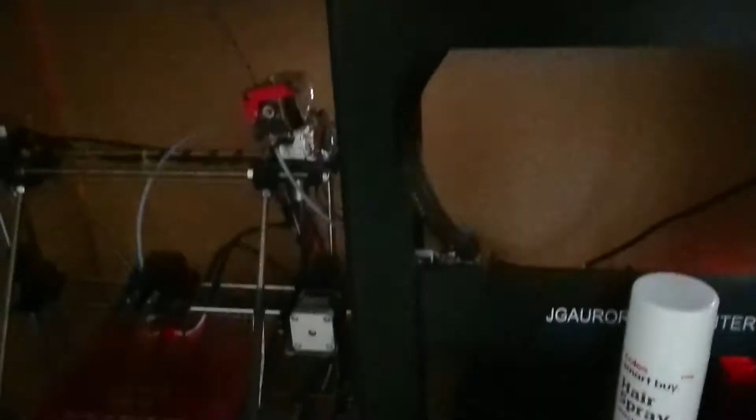The other ones are accessible only by reaching over my printer and my 3D printing area, which is a little condensed, so that's difficult to get to. So again, I think we'll make them electric.

Okay, I apologise for the background noise here. The RAF are doing training overhead.

I have a whole bunch of these motors with rather hefty magnets, as you've probably guessed by the way they're all sticking together in here in a big chain. I'm going to try and use a couple of these to drive the blind cords or blind chains.

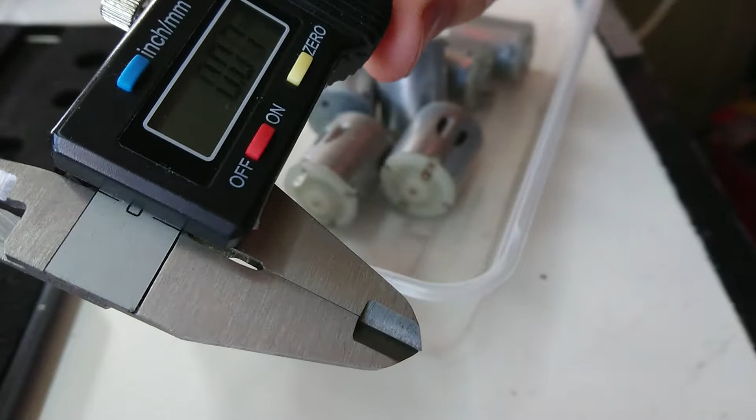I've already played with these before, so I know about the stats. I guess the next thing we've got to do is go and measure up the ball chain and get some specs on that, so I can make a drive cog. And then the decision will be whether or not I make this a belt drive or a gear drive.

Either way, I'm probably going to have to add some kind of a clutch. Although it probably won't be too much of a problem, because if I drive these too far, the blind just flips over the top and keeps making a hell of a racket. So we probably won't need a clutch, actually. So yeah, this could be a simple project. Let's go do some measuring.

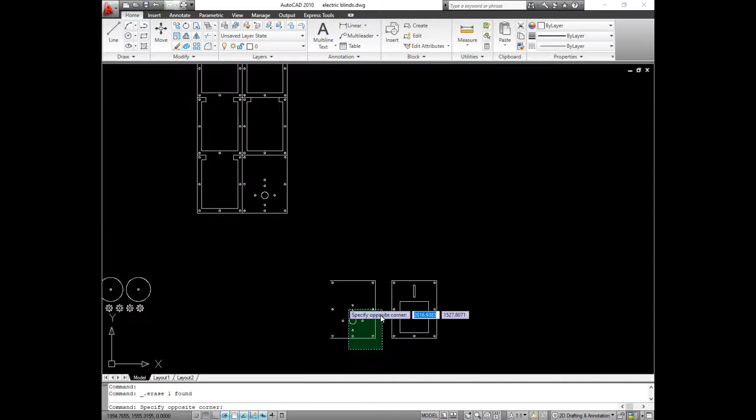After that montage, it's time to go out to the workshop and fire up everything and get ourselves happening. We're going to laser cut some stuff with that big monster over there.

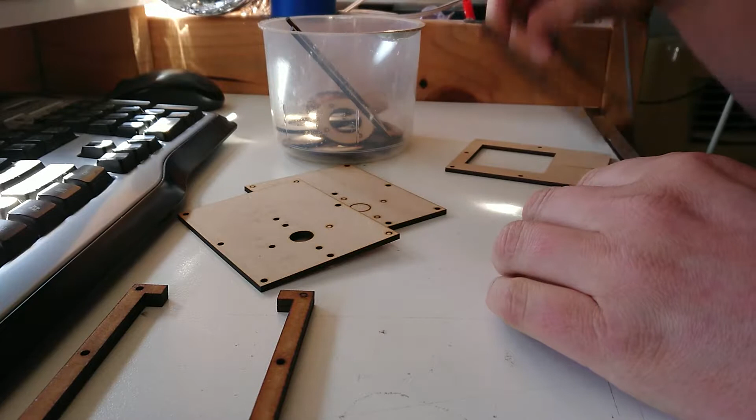Some parts - I noticed two of them I had to cut down. There were a couple of lines, two lines in fact, I forgot to draw in. So we've got some assembly to do and a sprinkling of little tiny parts as well.

First of all, I need to see if that fits the ball chain as I had intended, and then we've got to glue some guides and stuff together. The other thing I want to make sure went as planned is that these gears mesh properly.

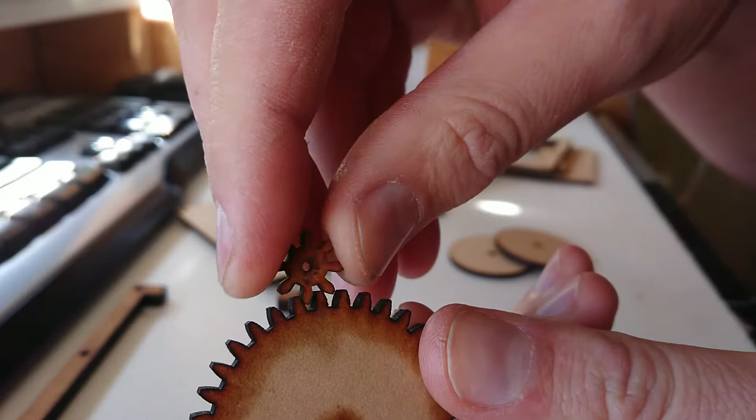They don't when they're up close, but at a distance, somewhere about where I set them, they should probably mesh. But anyway, let's hope that there's enough to reduce the speed.

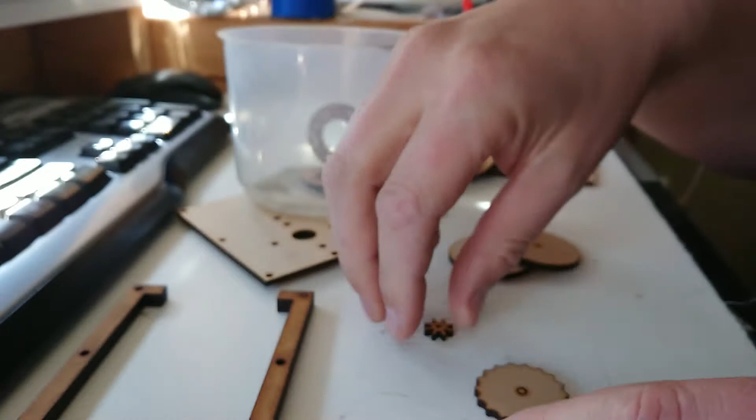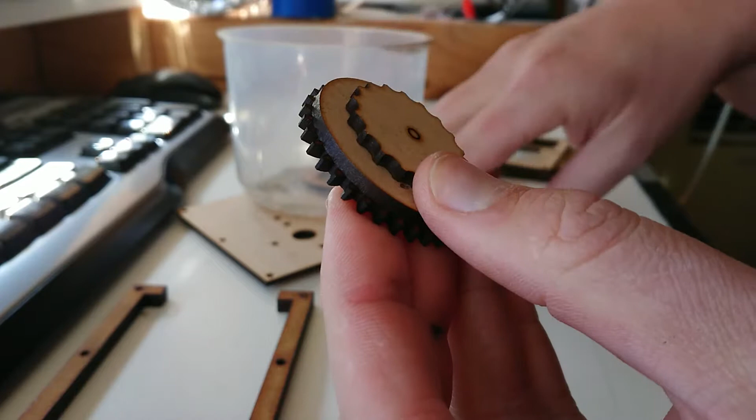Now, the way this will go is there'll be a gear on the outside here. This will go on the inside, and then this will layer in like that, and that should construct a pulley.

I'm not sure if I'll have to pack these out or not. We'll see if they fit the chain. I hope they do.

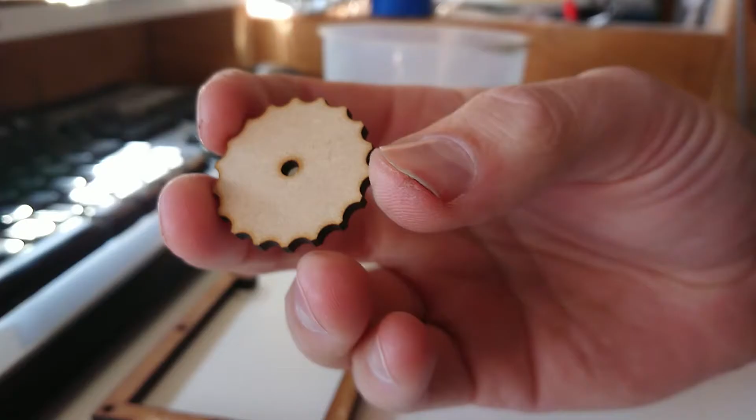Okay, so off camera I just went and checked. This fits the chain beautifully. However, the chain is a little wider than 3mm, which I should have known. It means I'll have to cut another one of these, but that's okay. We'll get the rest done first.

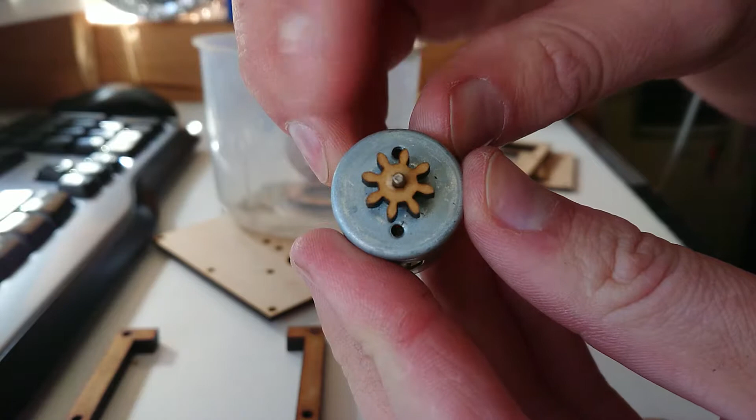Okay, the next step was to check that these would push onto the shaft nicely, and I think I've got the measurements just right. They've pushed through well and onto the splined section. The reason I've cut so many spares is for tolerance's sake - I might end up needing to insert two of these, but we'll see how we go.

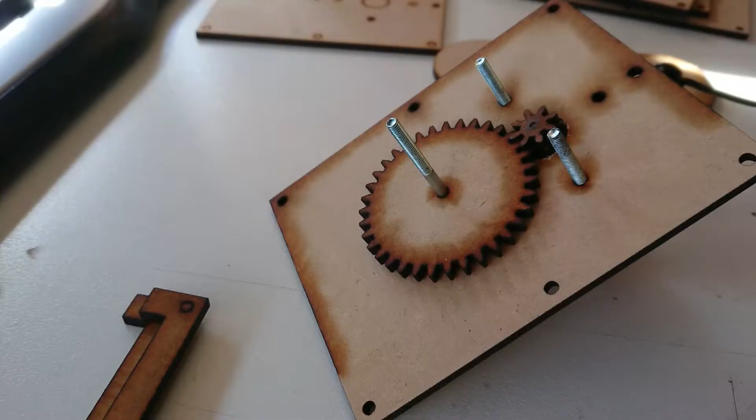The next step before I go too much further is to see how this will behave. I'm going to run this motor off 5 volts to start with and see how it goes, except we're going to have to position everything a little better. I'm going to have to hold this in place while we do this.

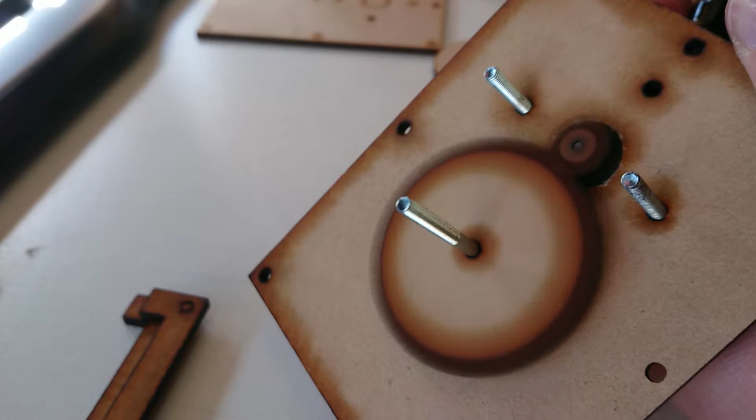That looks pretty good. Let's go up to 9 volts and see if it self-destructs. That looks alright. Let's move up to 12 volts.

It could end up being a little fast, so I might have to put a motor speed controller on this, but that was a consideration in the first place. But it looks like the gears are going to drive okay. A little bit of graphite and they'll probably lubricate up well.

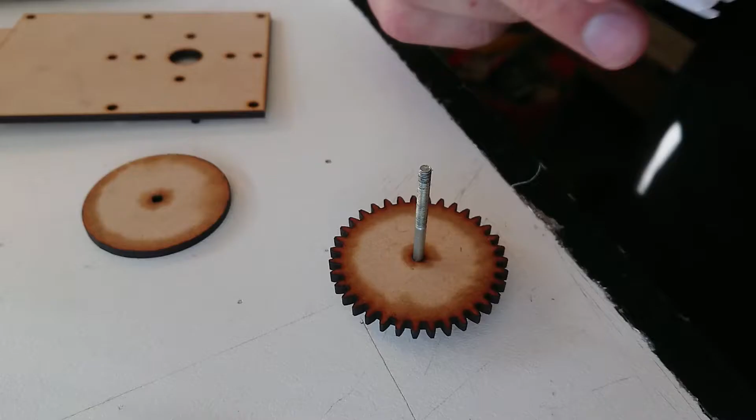Alright, that's good news. Now we've got the fun part - getting the super glue container open and hopefully not gluing my fingers together or anything else to the desk this time. Super glue, as you know or may not know, is best used in moderation.

But when it comes to MDF, it seems to do a pretty decent job. And the next question I'm going to have is, can I do this? My apprentice is excited in the background there. The next question will be, can I do this and still get these lined up properly? This requires a bit of dexterity, which I'm not great with right now.

Alright, they look like they may have gone together okay.

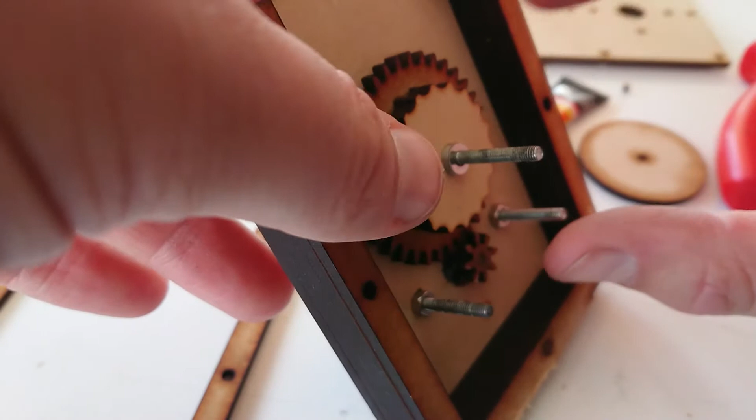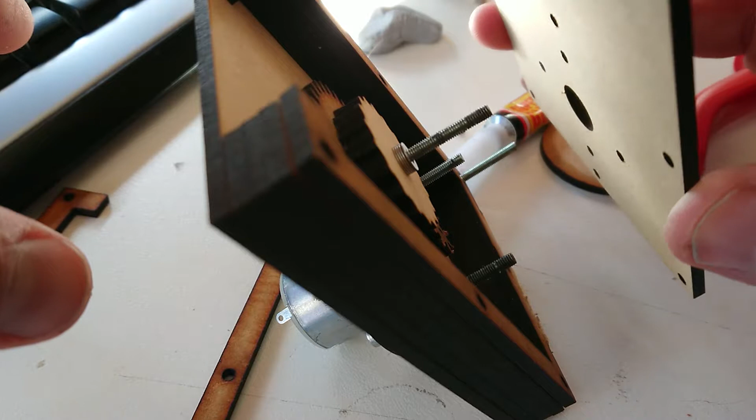I've got everything glued together and assembled. I've got a couple of washers behind and a stack in front, and our back plate should fit over all of this, but of course we'll have to thread the chain through first, and this is going to be a tricky assembly. I'm not quite sure how we're going to do this. I may even attach the back plate first and then go ahead and put the gears on. I'm not quite sure how I'm going to do this bit. I haven't thought too much about how I'm going to mount it to the wall, other than I might use this plate and an extra offset. So yeah.

Okay, we've got everything test assembled here and it all runs well. We have a little bit of graphite over here, and I'm going to add that for lubrication once we've got everything mostly assembled. You can see I've packed out a bunch of washers here, and there'll be some packed behind it. We'll have a back plate to go on to position everything, and then we'll have maybe this one or maybe this one, depending on how we're going to attach that to the original surface. I'm not quite sure yet. I need to test if this will actually drive the chain. That's going to be a little tricky, but yeah, we'll see what we can do.

Okay, so I went and test assembled this and used the lounge room blinds instead of the office blinds, and I discovered a fundamental problem. Whilst everything else works quite well in this, the motor just simply doesn't have enough torque, not at this ratio. And the torque ratio is just way too low to pull the volume on the cord I need. So I'm going to have to add some extra gear ratios into this.

But unfortunately I don't have the time to do that right now. I'm going to have to hang around, or maybe I might even have to find myself either a bigger motor or maybe even a stepper motor. But at the moment, well, functionally this works in principle, doesn't—I should say it doesn't work in practice. So yeah, I'm going to have to do some thinking. I've got to go back to the drawing board for this one. You might see more about this very soon.

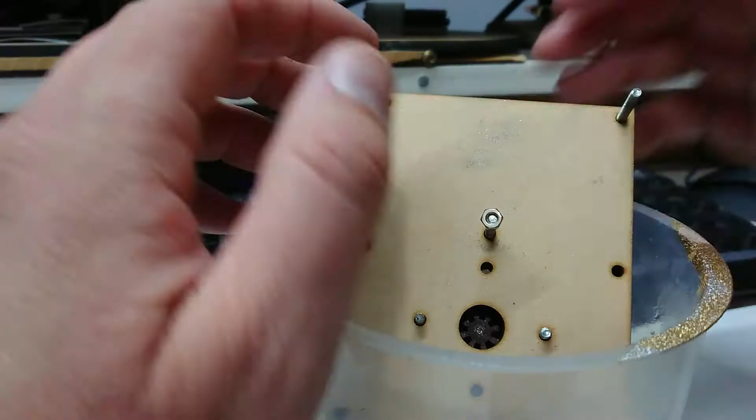Alright, well, I keep trying to make good use of these motors, and I just don't seem to be succeeding. This would work, I just need a little bit more torque or a bit more gearing. And that means rebuilding the whole thing from scratch, and at the moment that's less convenient than actually just reaching through and pulling my blinds up a couple of times a week. So yeah, I might shelve this one for now, and we'll revisit that in another video.

Sorry to call this a failure, guys, but not all of my projects work out, so I thought I'd start documenting some of the ones that don't, and that's what's happening.

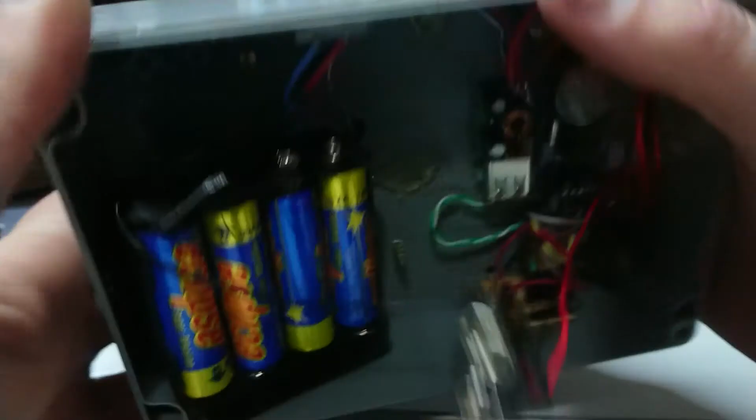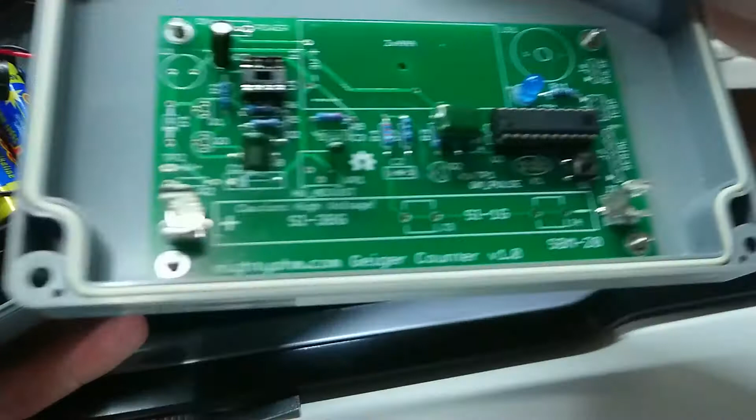But I can show you a quick sneak peek at some of the stuff that is going on at the moment, and that's this thing. We can pop the screen up here. I haven't got it plugged in and running yet. Beneath this, and you may have seen in a different video, is a Raspberry Pi 0W hidden in there. And underneath, I've also added a real-time clock, 5-volt regulator, and pretty soon there's a GPS going in this, as well as a Geiger counter. Now this one's going to be an interesting little survey job, but this is probably going to be an hour-long video by the time I'm done, or even more. There is so much development I've had to do for this, and there's still so much to go.

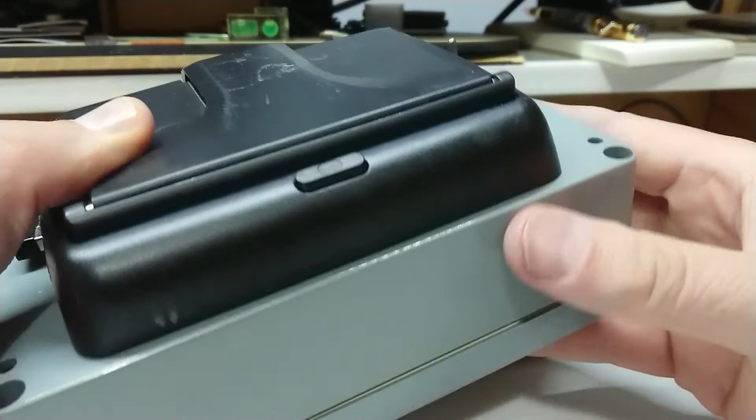And then there'll be a video of probably the survey, which may or may not, I don't know if I get permission yet, involve a military base. So, and maybe some fallout from Maralinga. Don't know yet, but yeah, definitely on the go. I've got the Geiger tubes and everything, I'm waiting on parts. So that's a video for the future. It's a bit of a sneak peek. But it's a big doozy one, and it's costing money and time and effort, and it's taking quite a while.

I have to have it done by the end of this year, before December, because I'm going to lose access to the area that I want to survey. So yeah, anyway, hopefully there'll be something more interesting to see in the near future. But look, thanks for sticking with it.